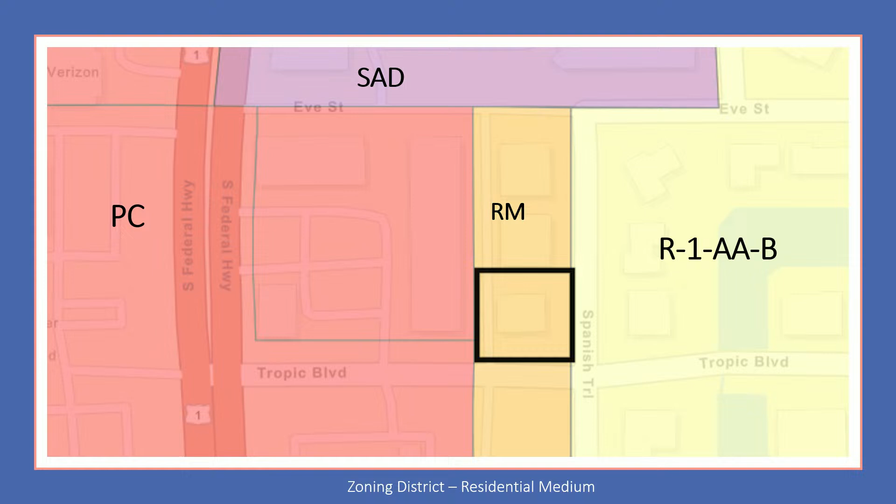It is located in residential medium zoning, again because it's a duplex. It abuts single-family residential lots, and across the street from it, on the western side, is a plaza.

The ordinance that controls for purposes of pools is section 4.6.15(G)(1)(a). That ordinance sets forth certain setback requirements: for the rear of a property, it's 10 feet; for the side interior line, it's 10 feet; for a side street, it's 10 feet. For the front of a property, it defers to the setback requirements that apply to duplexes. Because this is a duplex, the setback requirement for the pool in this case is 25 feet.

I'm going to show you a couple pictures of what the property looks like so you can get a sense of what we're looking at today and what this variance pertains to. For all intents and purposes, what is defined as the front of the property functions as the rear.

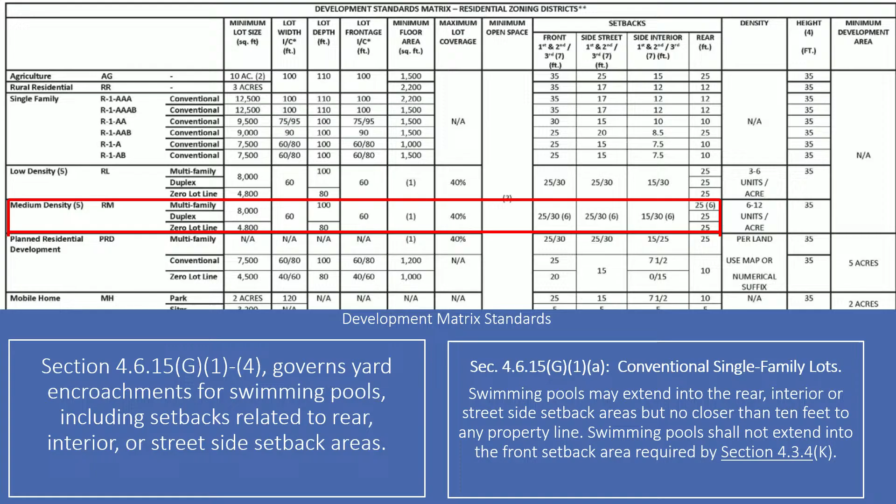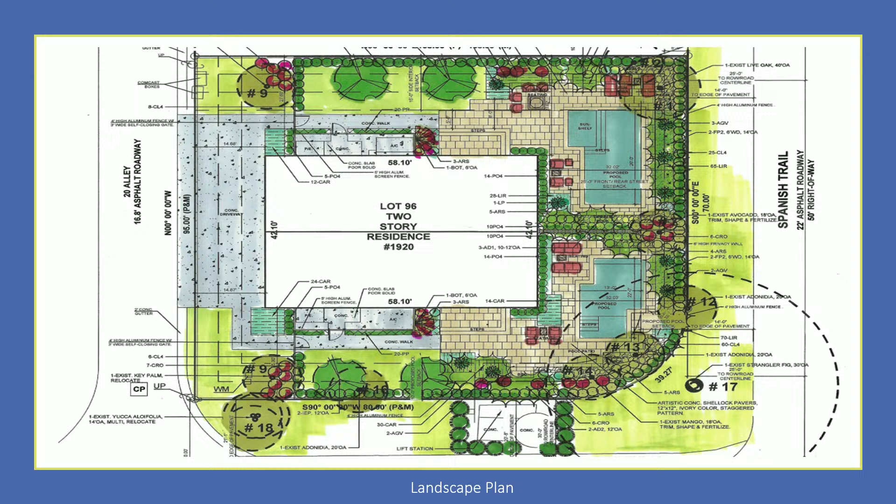There will be landscape screening around the fence. We intend to install a 4-foot fence to ensure the privacy concerns are addressed and to ensure adequate privacy for both the neighborhood and the inhabitants of the properties.

This is the current site plan. As you can see, there are a couple of features specific to this property that are relevant for purposes of today's hearing. There is mechanical equipment on the southern side of the property. There is also the entrances to the duplexes, the concrete walkways you can see on the top and the bottom.

The back half of the property is grass. There is nothing there to date that would inhibit us from installing these pools. But the other sides of the property have certain fixtures attached to them right now that make installing pools almost impossible.

There is also a lift station on that side of the property, the bottom half of the screen we're looking at. It is outside the property line, but it is relevant for determining where a pool could be installed on this property.

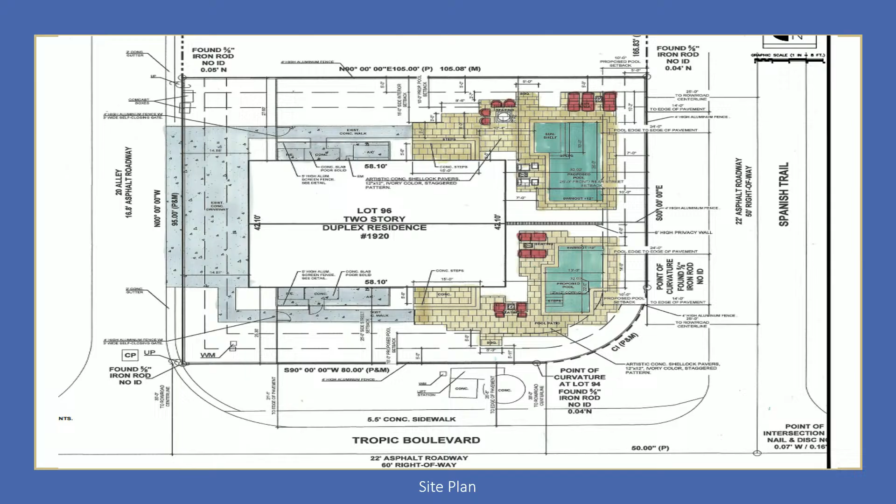This is the survey again, depicting the current layout of the property. Those sides you're looking at on the top and bottom are the entrances to the duplexes. That back half is considered the front of the property. The other side, labeled concrete driveway, is used as a driveway and is considered the rear of the property.

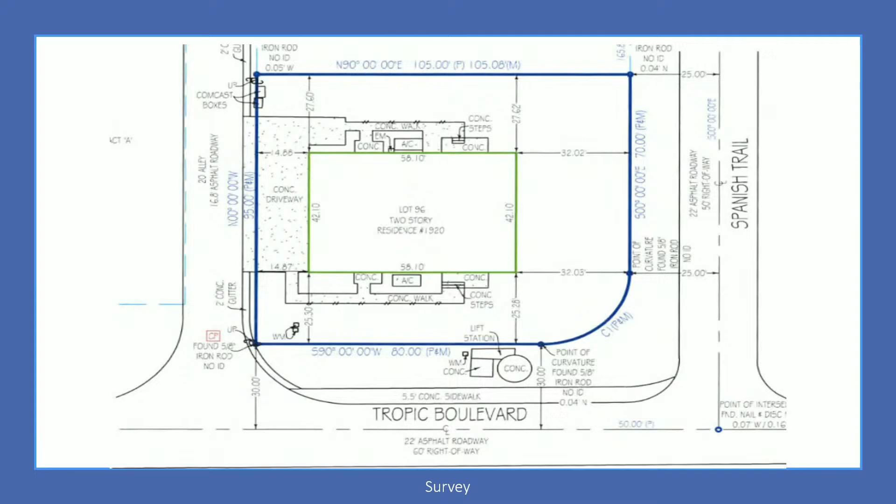So the only side governed by the 25-foot setback is the front of the property. This is the rear, as mentioned. The slideshow does say 25-foot setback, but I want to clarify: it is 10 feet on all the other lot sides, so this side is subject to a 10-foot setback. But again, this is a driveway used for parking. As you can see from the image, there is concrete. It is functionally used as the front of the property, and that is how it has always existed.

This is the front of the property, so this is where we intend to install these pools. Really, it is the only place that functionally makes sense to have pools at a property like this. It is all green space, and for all intents and purposes, it functions as a backyard. This is another photo of what is considered the front of the property.

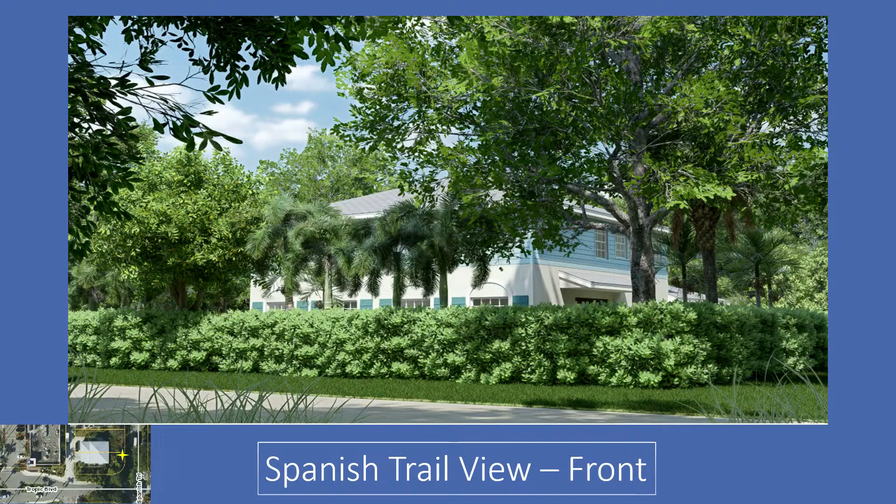This is a view from the side street, Tropic Boulevard, and this is the view from Spanish Trail. Again, this is the front of the property. We intend to make sure the property is adequately covered to ensure the privacy of the residents in addition to the privacy of the community. It will also function as a sound barrier, and more than that, it is a huge improvement from the current state of the property today.

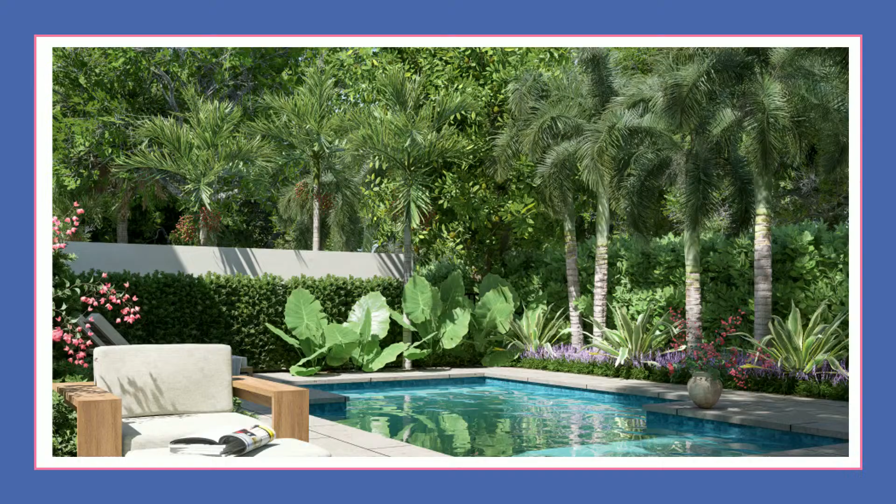These are a couple of images that show what those pools will look like, in addition to the landscaping we intend to do on the inside.

So all in all, that's the variance request tonight: a request to reduce the 25-foot setback to 10 feet. The real issue here is that the front of the property, what is covered in grass right now, is considered the front of the property when the driveway is on the other side.

Because of the classification of the front of the property and the manner that it's been classified under the code, it is subject to a higher setback requirement, that 25-foot setback requirement. I'm going to go back for a second to that first slide.

If you look at the aerial of this property, the pools in the neighborhood are on the back lots. Of course, those rear areas are classified as the rear of the property, but for all intents and purposes, that is what this area serves as.

There are certain criteria that the board must consider: that special conditions and circumstances exist which are peculiar to the land, structure, or building involved and are not generally applicable to other lands, structures, or buildings. That a literal interpretation of the regulations would deprive the applicant of rights commonly enjoyed by other properties subject to the same zoning, that the special conditions and circumstances have not resulted from actions of the applicant, that granting the variance will not confer onto the applicant any special privilege, that the reasons established in the variance petition justify the granting of the variance, and that the granting of the variance will be in harmony with the general purpose and intent of existing regulations. We submit tonight that this variance request is in compliance with all of these criteria.

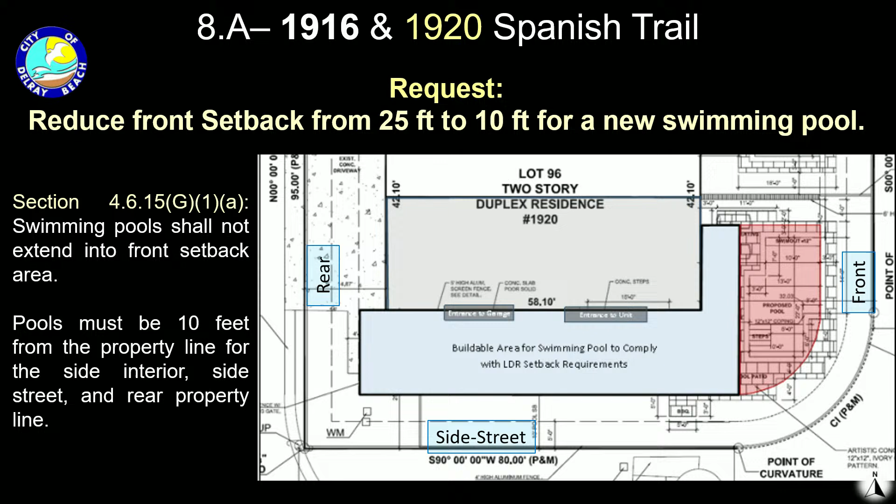So some things, the request is for the determination and the location of the pools for the pool edge per findings, because we do the setback from the edge of the pool to the property line. Some elements that will be reviewed during permit that aren't part of tonight are the pool deck, which has to be set back 5 feet from the property line for drainage purposes.

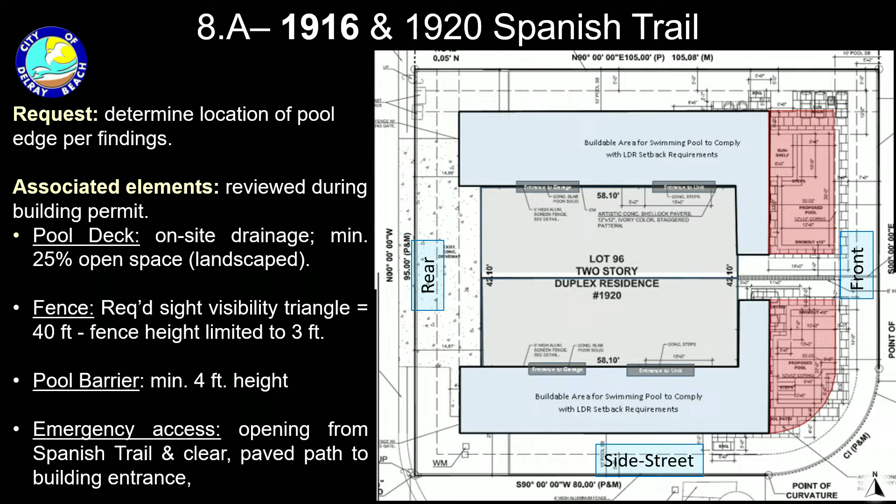The fence, and in this particular neighborhood, there is a 40-foot sight visibility triangle, which means any landscaping or fence outside of that has to be below 3 feet. The pool barrier, which is a requirement of a minimum of a 4-foot height, and emergency access.

So these are your findings. You have the special conditions and circumstances, which are peculiar to the land, structure, or building, that the literal interpretation would deprive the applicant of rights commonly enjoyed by others, and that the special conditions and circumstances have not resulted from actions of the applicant.

That this will not confer onto the applicant a special privilege, that the variance petition justifies the granting and is the minimum variance that can be sought, and the granting of the variance will be in harmony with the neighborhood. And these are your options for board action.

I'm sorry, that concludes my presentation.

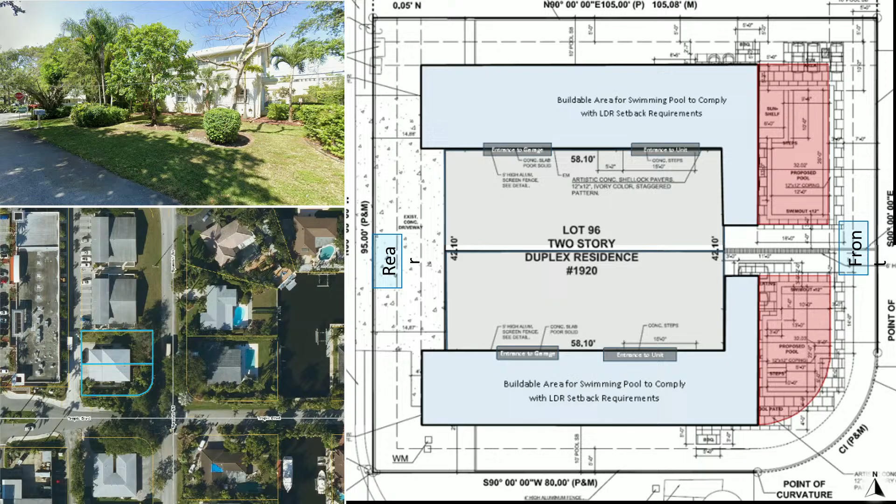I didn't realize the alley was non-conforming in its current state. Again, we looked at the setback. We have another home in the Palm Trail neighborhood on Northeast 7th that has this exact same configuration, and the pool is in exactly the location that we're referring to. Every house in that strip, Northeast 7th, if you're familiar, has the pool with an alley behind it, abutting commercial, with the same configuration. So it was something that, because of that, we have the access point from the alley, and then the pool in the functional rear of the house, but what would be considered, I guess in this case, the front.

Okay, thank you. I guess any other board members have any questions or comments, either among ourselves or based on the points that were raised?

I have a comment that was made earlier, but I think this is precedent setting. If we do this, you have a lot of homes in this kind of situation because of the alleys, and a lot of front yards that somebody might come in here and say it's a backyard. I just want to remind the board that you don't set precedent by each case. Every case is reviewed on its own, and I understand there may be people that may bring that in as an example. It doesn't mean that you can't look at every single property and say this is the special condition that exists on X property and this is not existing on another property. So just want to make sure you guys understand that.